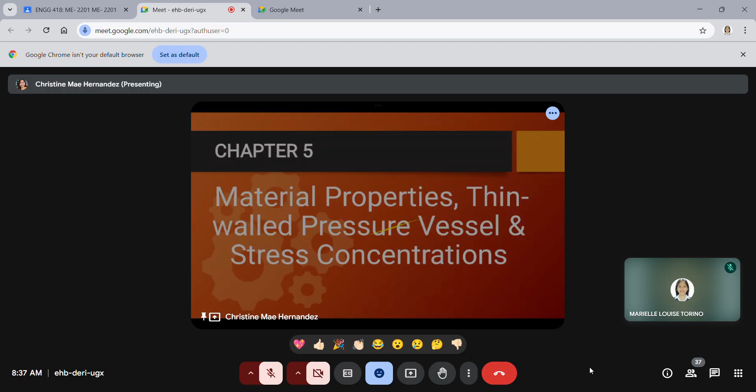So next na tayo, material properties. Pag sinabing material properties, it refers to the characteristics or attributes of materials that determine how they respond to external forces or conditions. First, mechanical property. It includes strength, elasticity, hardness, toughness, ductility, and brittleness. They describe how a material reacts to mechanical forces like tension, compression, and shear.

Second one is thermal properties. It includes thermal conductivity, expansion, heat capacity, and melting point. This determines how the material behaves when temperature changes.

Next is electrical properties. It includes conductivity, resistivity, dielectric strength. They characterize a material's ability to conduct or to insulate electric currents. Optical properties include refractive index or reflectivity, transparency, and absorption. They describe how a material interacts with light.

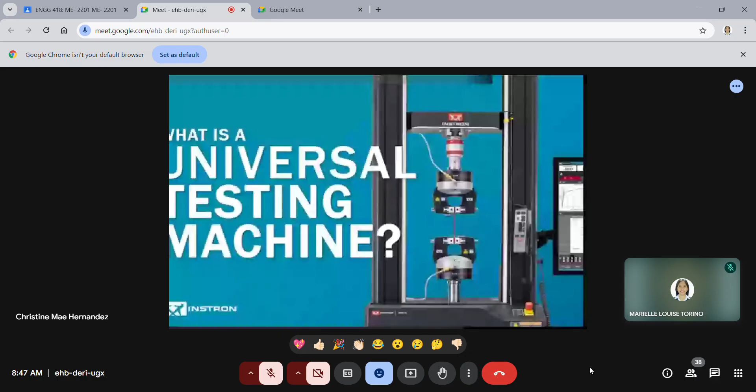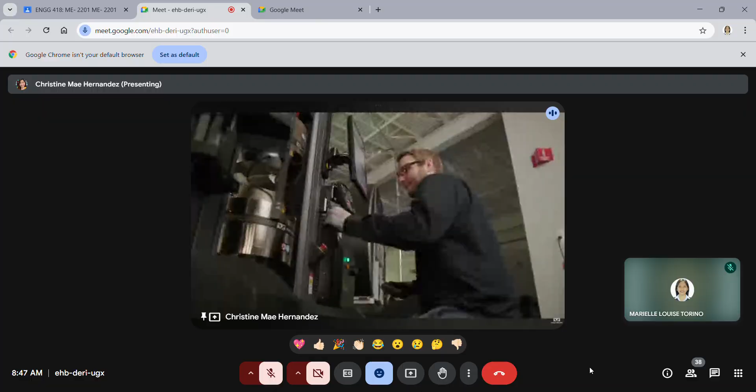You may have heard about universal testing machines, also known as tensile testing machines. But what are these machines? What are they used for? And do you need one? Universal testing machines are designed to test the mechanical properties of materials, components, and products.

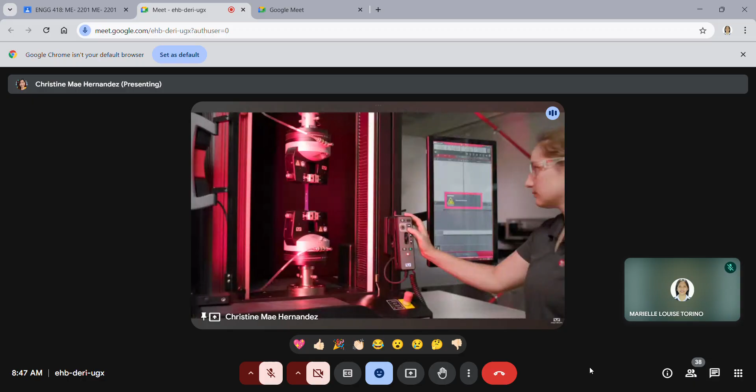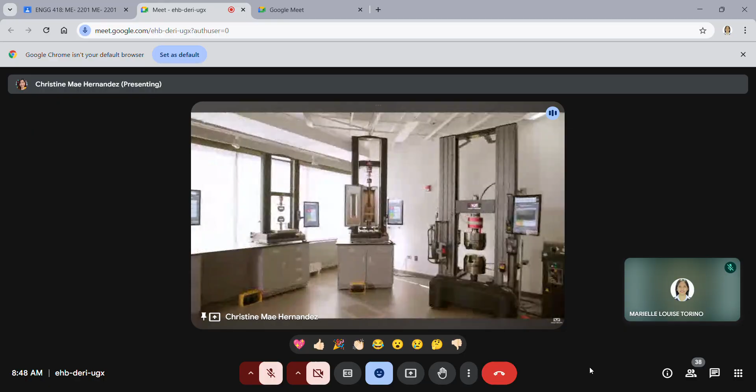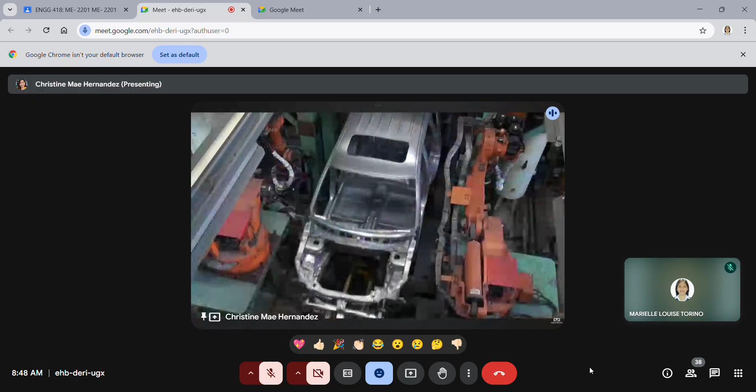They can be powered by either electromechanical or hydraulic means to perform different types of testing, such as tensile, compression, bend, peel, and tear testing. Universal testing machines are used to evaluate materials like plastics, metals, elastomers, and composites. This means they are used for many purposes and in many industries, including the automotive, aerospace, electronics, packaging, and biomedical industries.

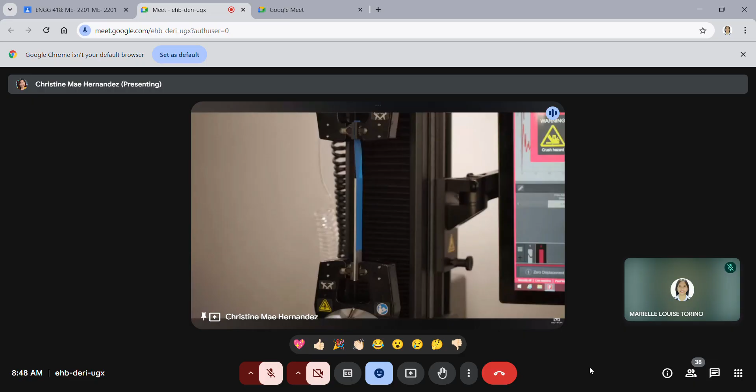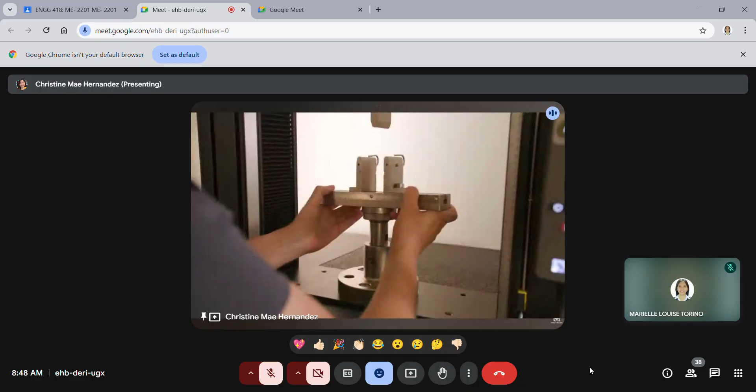Universal testing machines are a versatile and important part of any product design and manufacturing process because they are used to make sure that the materials being used and the final product meet the required specifications. To ensure consistency between different manufacturers, specifications for testing different materials and products are often governed by national and international standards organizations, such as ISO and ASTM.

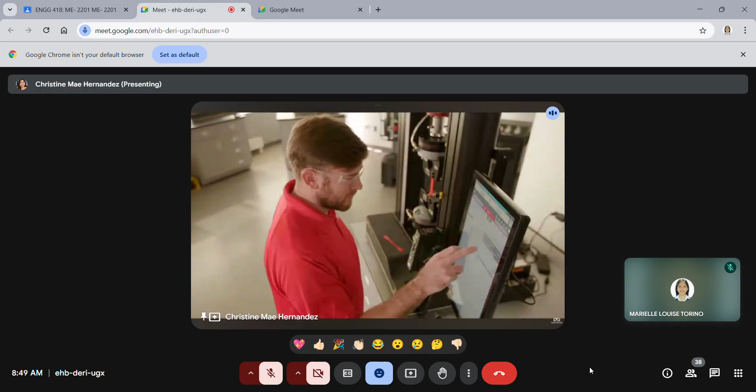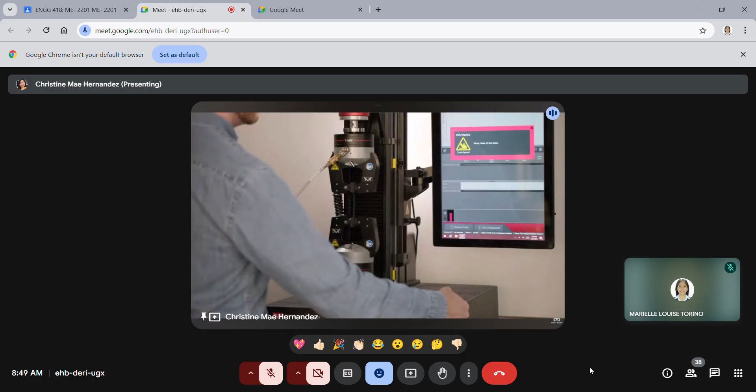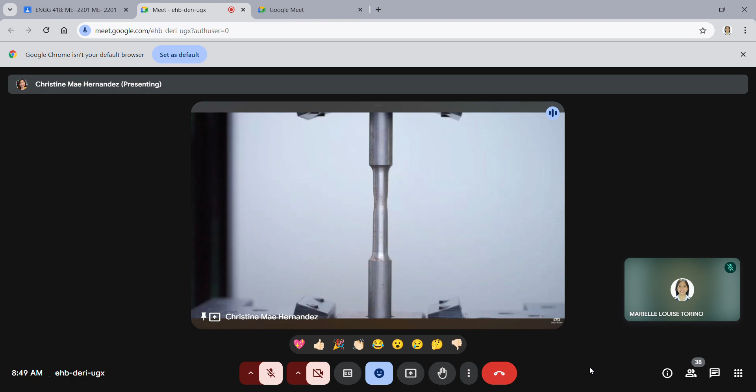Universal testing machines are used during several stages of product development. During the research and development phase, they might be used to determine which materials should be used. After production, quality assurance labs use them to verify a product's quality before it goes to market. For example, tire manufacturers need to make sure that elastomers meet their requirements for elasticity, and they need to confirm that the rubber used in tires will behave properly under a wide variety of temperatures and conditions. Aerospace manufacturers need to make sure that the composites used to construct an airplane wing will flex properly without breaking. Metal used in construction needs to be strong enough to bear the weight required by the project design.

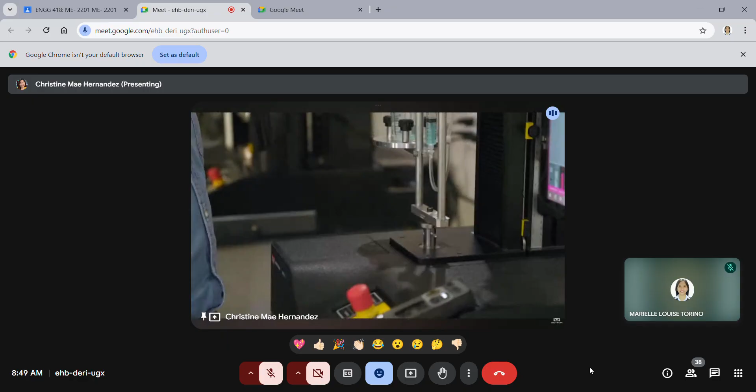And every component in a consumer product, even the screen on your phone, needs to be durable and impact resistant. Some products, such as medical devices, come with a high cost of failure. These products are highly regulated by government bodies like the FDA and are required to pass rigorous testing before they can go to market.

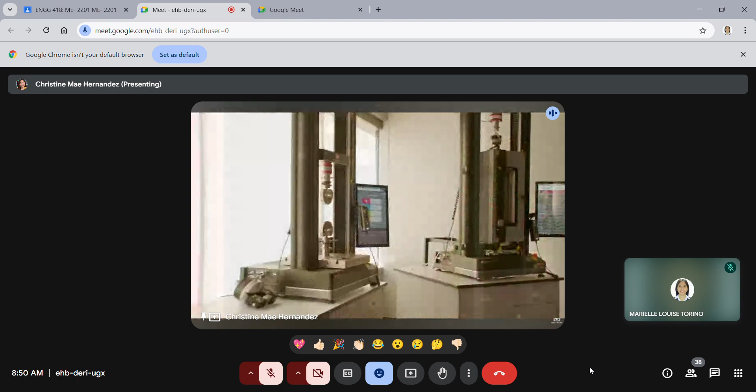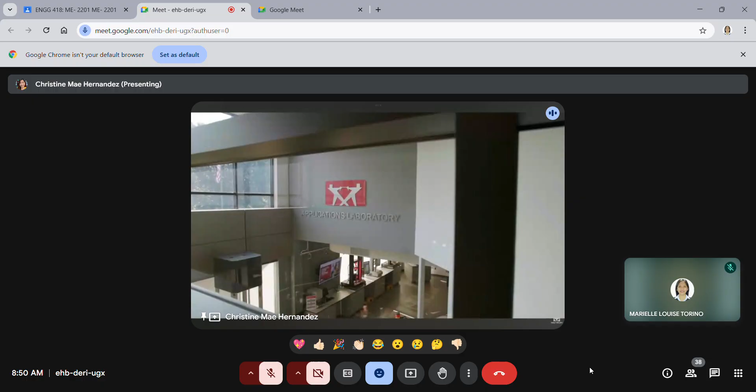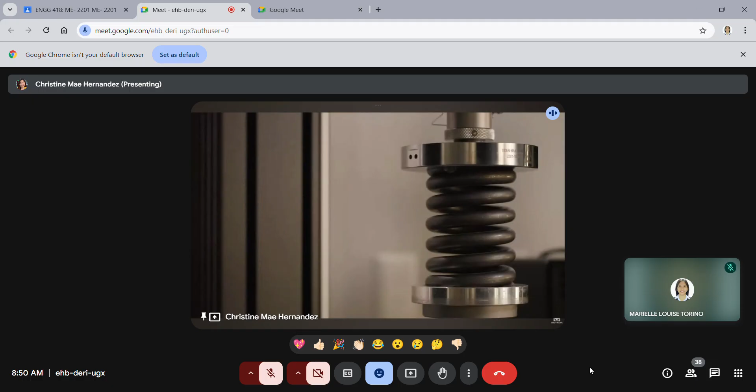Universal testing machines can perform a number of important mechanical tests, such as tensile, compression, peel, tear, friction, bend, and shear. These tests tell us about the mechanical properties of a material or component: how strong and stiff it is, how much it can elongate or stretch, how much it can compress, and how much it can flex before breaking.

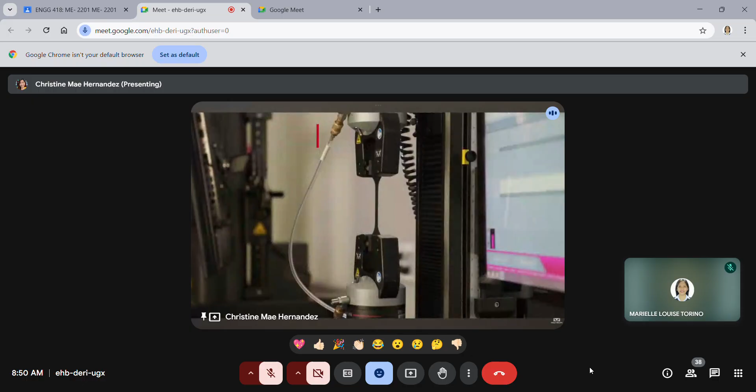They can also measure the strength of an adhesive bond. The data produced by universal testing machines include measurements of a material's modulus of elasticity, yield point, flexural modulus, ultimate tensile strength, and more. To learn more about universal testing machines, how they work...

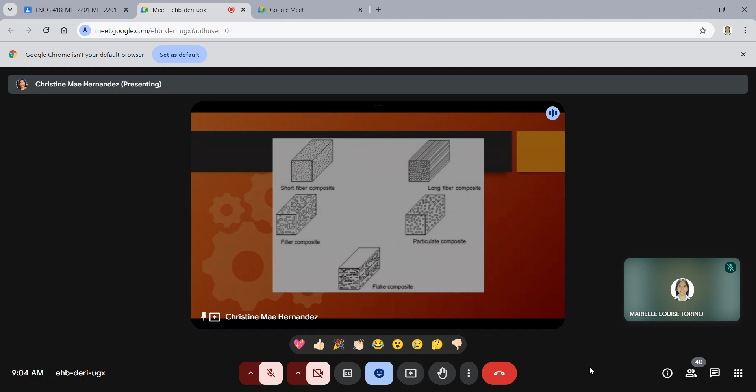Next is si composite. Yung mga composite natin, ang best example natin is si fiberglass. Composites show complex stress-strain behavior due to its combination of different materials. So combination na to, they can exhibit high strength and stiffness with varying degrees of ductility. Materials made from two or more constituent materials with significantly different physical or chemical properties. So again, depende din sa kung anong materials ang pinagsama mo, pwede siya maging ductile, pwede maging brittle.

Next is elastomers. Best examples are rubber and silicone. Remember the stress-strain diagram we discussed - here the elastic region is much longer because this is rubber and silicone. Elastomers show large elastic deformation, with a relatively flat stress strain curve in the elastic region.

They can stretch - no matter how much you stretch it, it will always return to its original shape. But of course we still have yield stress and ultimate stress. They can stretch significantly before breaking, and there are still warning signs. So polymers with viscoelasticity generally have low Young's modulus and high failure strain.

Temperature also has effects on the stress-strain diagram. For elastomers, the elastic modulus or stiffness typically decreases when temperature is high, making the material less stiff and more flexible, like rubber. At low temperature, the elastic modulus will increase, making the material stiffer and more brittle. So thermal effects really matter.

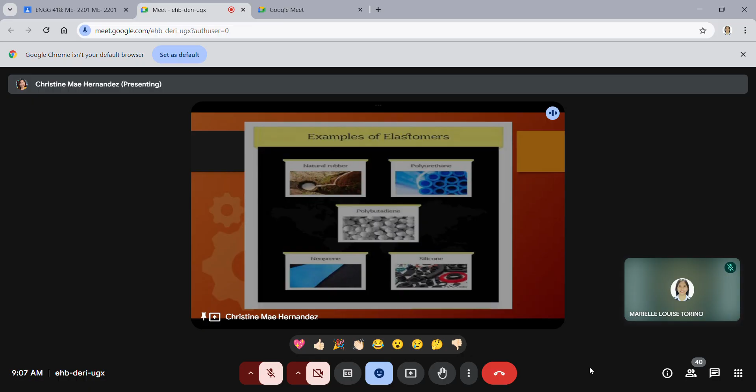Next one is Hooke's law. Hooke's law is a fundamental principle in mechanics that describes the linear relationship between the force applied to a material and the resulting deformation, provided that the material remains within its elastic limit.

So in Hooke's law, referring back to our stress-strain diagram, in the elastic behavior or elastic region - the proportional limit - as long as you're in the elastic region, it follows Hooke's law. Hooke's law states that the strain in a material is directly proportional to the applied stress, within the elastic limit only.

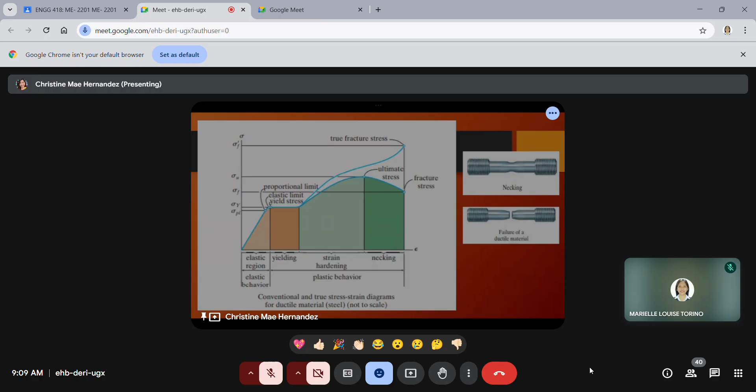The elastic limit is the maximum stress that a material can withstand without undergoing permanent deformation. If you go a little past the elastic limit, the material will not return to its original shape when the load is removed, and Hooke's law no longer applies. So Hooke's law only applies to the elastic region or elastic behavior.

Going back to this: stress is equal to Young's modulus - the measurement of the stiffness of our material, also called the modulus of elasticity since it's only in the elastic region - times our strain. Hooke's law assumes a linear relationship between stress and strain, and it does not account for the effects of temperature on the material properties.

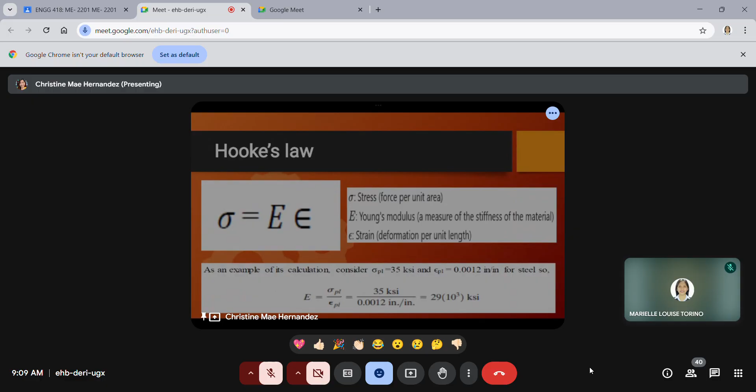Again, Hooke's law is for the elastic region. Strain hardening, on the other hand, is for the plastic region. So if Hooke's law applies to elastic region or elastic behavior, strain hardening applies to plastic region or plastic behavior. Strain hardening is also called work hardening.

It is the process that increases the strength and hardness of a material through plastic deformation. It occurs when a material is plastically deformed, causing an increase in dislocation density. This process makes the material harder and stronger, because strain hardening or work hardening begins once the material exceeds its yield point.

Its applications are in metalworking, manufacturing, machining - like rolling, drawing, bending - which utilize strain hardening to enhance mechanical properties. It can also improve the strength and durability of a component. In machining, it helps in selecting appropriate machining strategies to avoid undesirable hardening of workpieces.

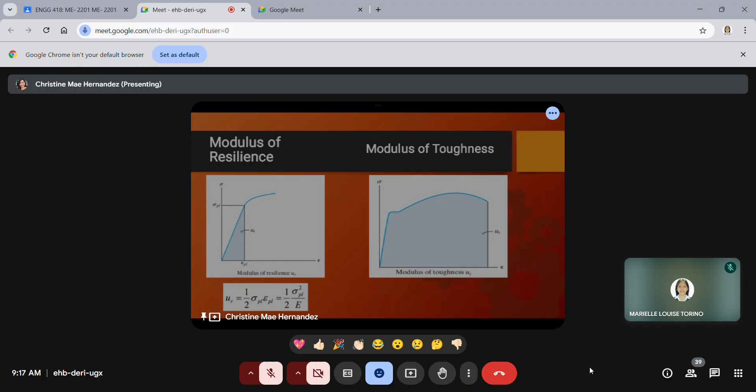Next one, Poisson's ratio - a fundamental material property that describes the relationship between the axial strain and the lateral strain. The formula for Poisson's ratio is negative lateral strain over the axial strain or longitudinal strain. It is the ratio of the lateral and axial strain of a material when stretched or compressed.

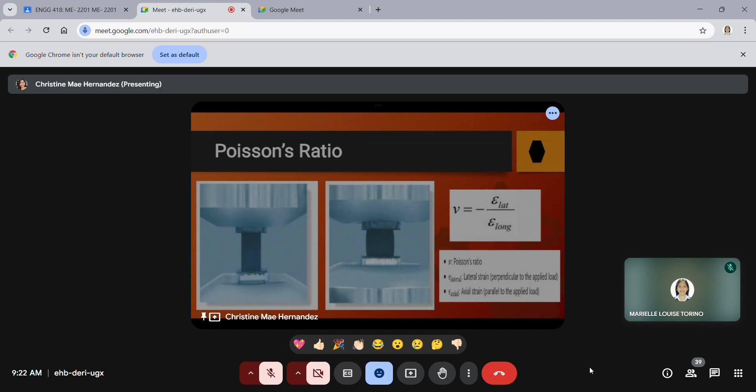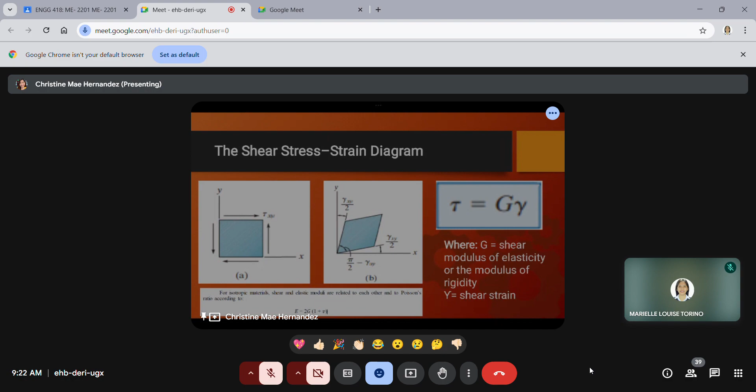Shear stress strain diagram. So kung kanina may true stress strain diagram, ito shear stress strain diagram. Katulad lang din siya ng true stress strain. Meron din tayong proportional limit, may elastic region, yield point, plastic region, ultimate shear stress, fracture point. So ang difference lang, ang kinaibahan lang nito is that ito is shear, yung kanina is stress mismo. Okay?

So isipin nyo na lang na, halimbawa kayo, pinahawak kayo ng baso lang, walang lamang tubig yun baso, 24 hours mo nga hawakan. So ano mangyayari? Sa unang oras, madali lang, nadadalian kasi magaan lang naman. Pero ano mangyayari sa after mga 6 hours, unti-unti ka nang nangangalay, no? Parang bigat na ng baso, parang sinasalin ng tubig yung baso, kahit wala naman talaga siyang tubig. Diba? Kasi bumibigat. So yun yung tinatawag na creep, kung dapat yung material mo has to support a load for a very, very, very long period of time.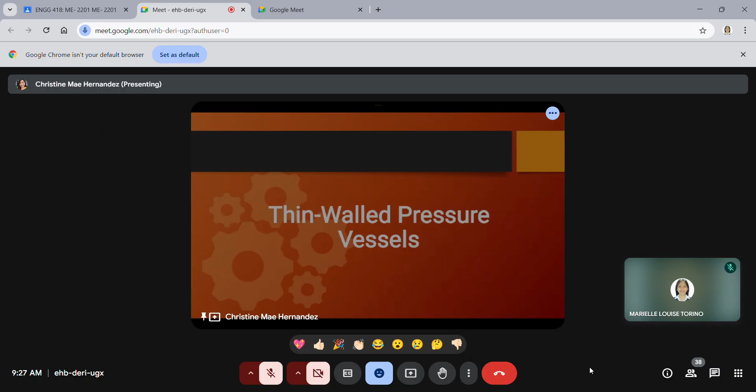So ano ba yung applications ng ating thin-walled pressure vessels? Una is power generation, pwede siyang mga boilers, diba, reactors, where high pressure steam is generated. Next, pwede din siyang fuel containers used in storage tanks for liquid and gaseous fuels. And last is pressurized gas storage, ito yung mga tangke for storing gases like oxygen and nitrogen. So yun yung mga thin-walled pressure vessel natin.

So again, meron tayong 3 types ng thin-walled pressure vessel. First is si tangential stress or yung ating circumferential stress. So as you can see, hinati natin yung ating tank sa dalawa, sa left and right. So hoop stress is a type of stress experienced by the wall of a cylindrical or spherical pressure vessel when subjected to internal pressure. Pag sinabi ng hoop stress, it is the stress acting tangentially to the circumference of a cylindrical or spherical vessel, and it is also perpendicular to the axial direction and serve to counter the bursting effect caused by internal pressure.

So consider yung tanke na shown being subjected to an internal pressure P, diba? Then meron daw tayong length ng tank na L, and yung ating wall thickness na T. So isolating the right half of the tank, magkakaroon tayo ng formula na: hoop stress is equal to pressure times the inside diameter over 2 times the thickness. So if meron siyang external pressure, aside sa internal pressure, magkakaroon tayo ng bagong formula, itong second formula: hoop stress is equal to internal pressure minus external pressure times diameter over 2 times the thickness. So wait lang guys.

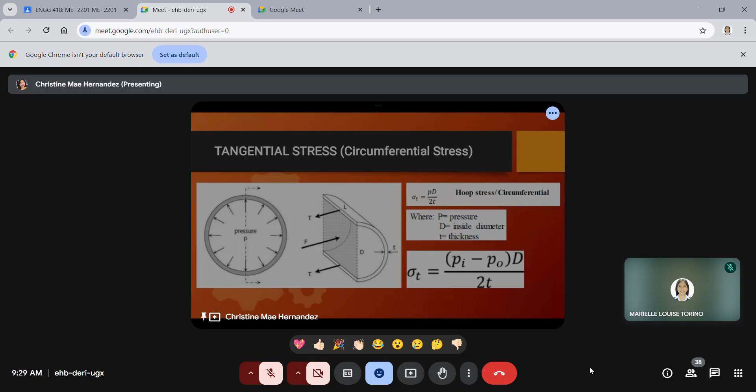So this is our formula for tangential stress, or circumferential stress, or hoop stress. We covered the two types of our pressure vessel. Okay? So tomorrow, we'll do problem solving on this.

Next is longitudinal stress. Here, what we consider are the two ends of our pressure vessel. So it's either tension or compression - you can compress it or stretch it. Longitudinal stress is the internal stress that occurs when a force is applied parallel to the longitudinal axis of a material, causing it to either stretch or compress. It can be tensile stress or compressive stress.

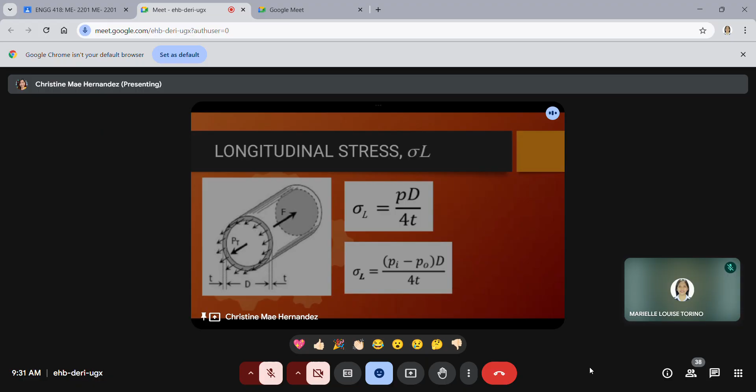So consider the free body diagram in the transverse section. This is used for, or its application is, our beams and columns. When you stand it up, it can either stretch or compress, so to compute the longitudinal stress, it's pressure times diameter over 4 times thickness. Our hoop stress is over 2T, but you wouldn't use hoop stress for a column or beam, since we don't split the column or beam - that's for longitudinal stress, since beams or columns are compressive.

Next is spherical vessels. A spherical pressure vessel is a type of container designed to hold fluids or gases under pressure, characterized by its spherical shape. It is a container used to store gases and liquids under pressure, as long as it has a spherical shape. The formula here is the same: pressure times diameter over 4T.

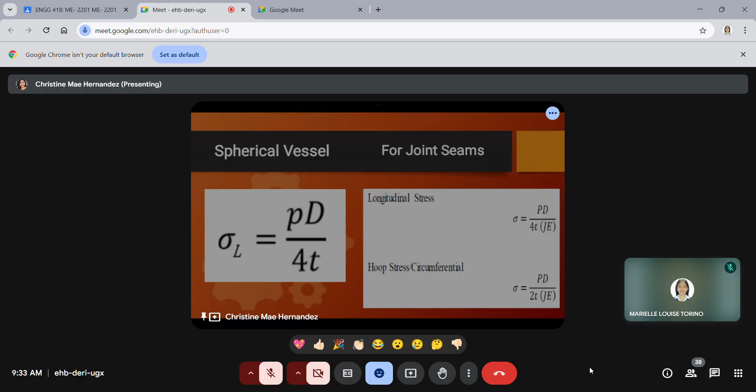Okay, so to summarize today's discussion: we discussed material properties - mechanical, thermal, electrical, optical, chemical, and physical properties. We focused on mechanical properties, where we have tests such as tensile, compression, shear, torsion, and impact.